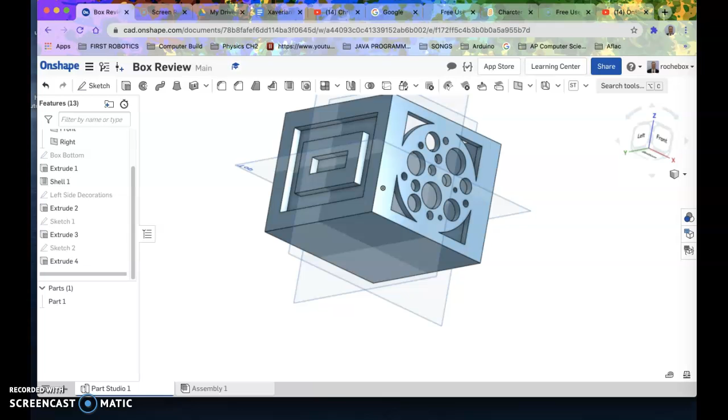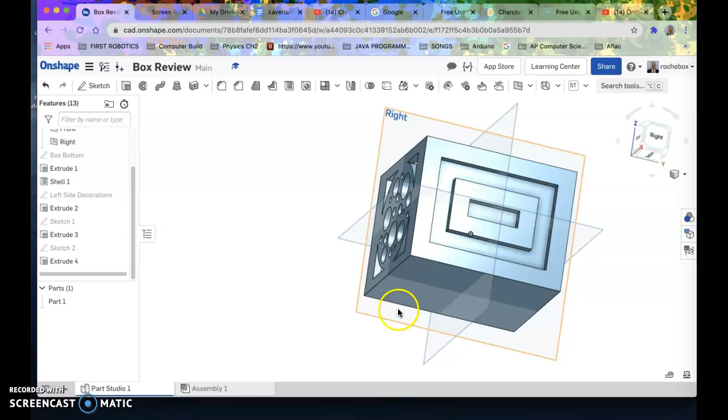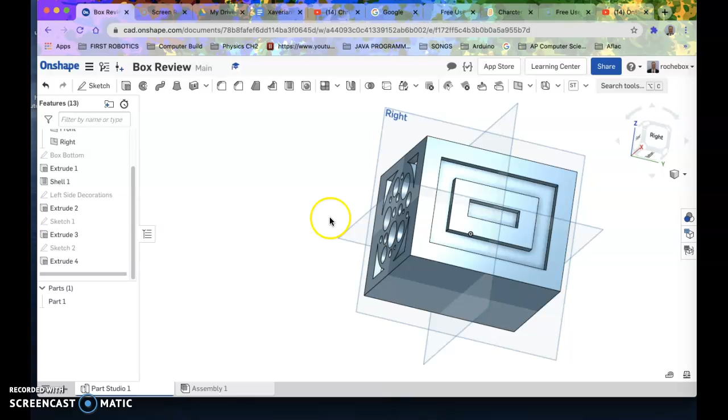We have been working on our box, and what I wanted to do is add some feet to the bottom. In doing that, I wanted to show you a little bit about how you might go about making multiple things, like 4 feet, 5 feet, or 6 feet, or however many feet you might want to use. There are tools on Onshape for you to use to copy things and make multiples of the same thing. There's mirror and linear pattern, which are 3D tools I'll show you how to use. There's also similar tools on the 2D side when you make a sketch. So we can talk about them too.

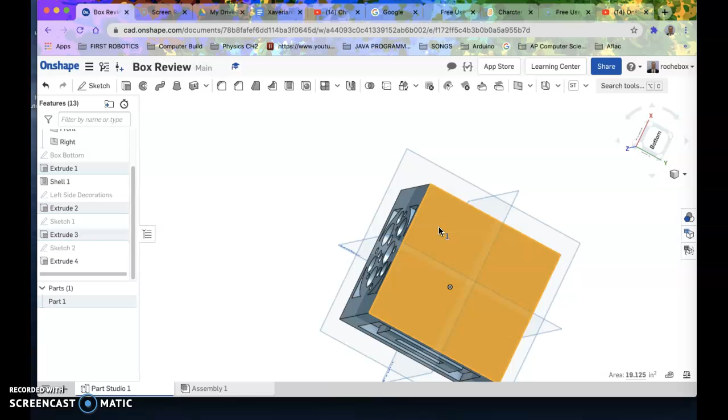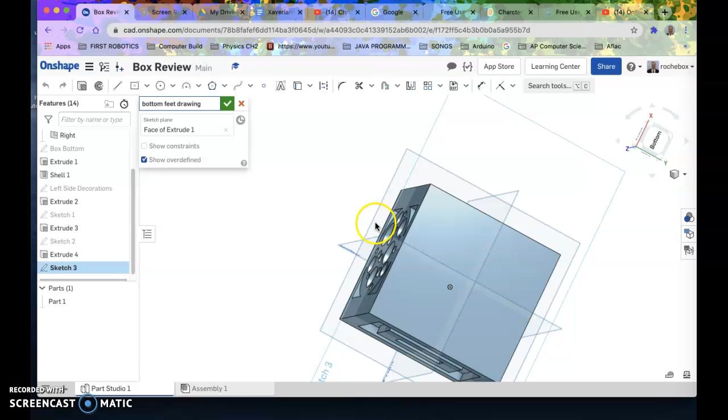Our goal right now is to try to make 1, 2, 3, 4 feet, or maybe more. What we're going to do is click on the bottom. I just clicked on that. I'm going to right click on the bottom and say make new sketch. Now it's in a weird position to make a sketch. I might call it bottom feet drawing, something like that. But the bigger problem is it just doesn't look like it's in a good place, so I'm going to say view normal to sketch plane. I might roll this over because the bottom isn't actually like that. Looks pretty good, that's straight on.

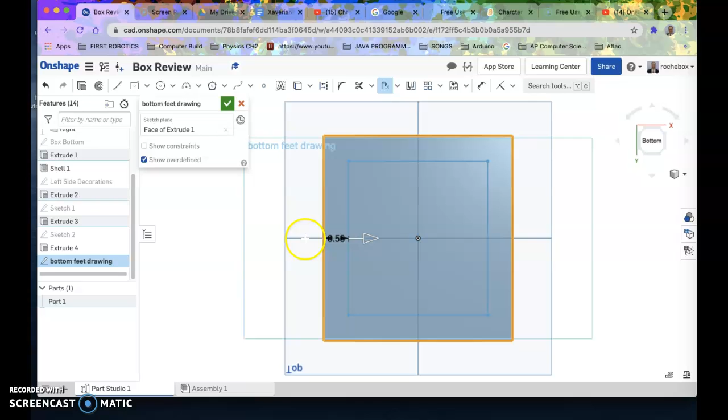So what I'm trying to do is find some places to put these feet, and I'm thinking about making round feet. One way to do this, let me see if I can do this just with offset. I'm going to turn on all of these lines. Yeah, it looks like it's working pretty well. So I'm going to pull this in, and in my thing, I think I want to make them about a half inch round.

So I'm going to make this like 0.65 - whoa, that's not right. I'm going to go back to here. I'm going to make this 0.65, like that, to make it a little bit smaller. And then I don't really care about this square, I don't want to do anything with it. So I'm going to do something special to it.

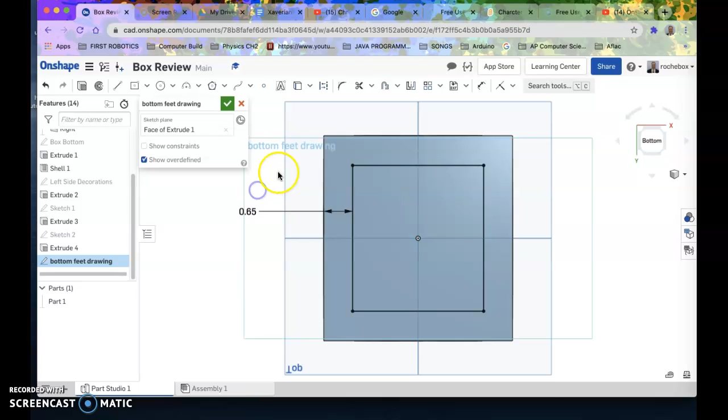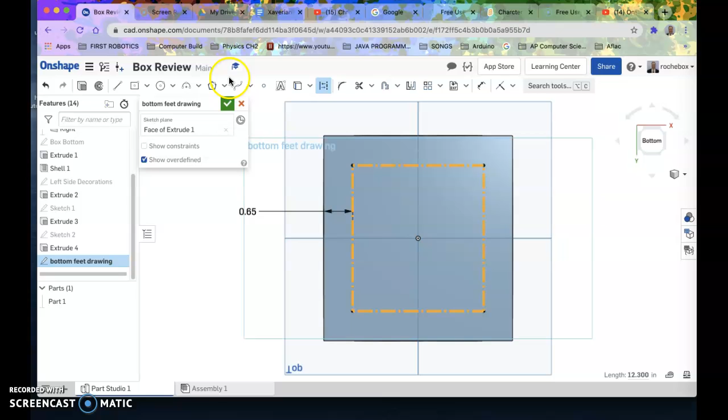I'm going to click all the edges on it, and then I am going to hit this thing called construction line. What it does is make a kind of line or guide that you can use. I know that all of these points fit well and are sort of symmetrical, so I can figure out what I need to do.

So what I want to do is make round feet. I'm going to hit the round circle, center circle tool, and push this out. Oh, it's still doing construction lines, so I have to turn this off. Come here, go this way and see what this looks like. That looks pretty good to me.

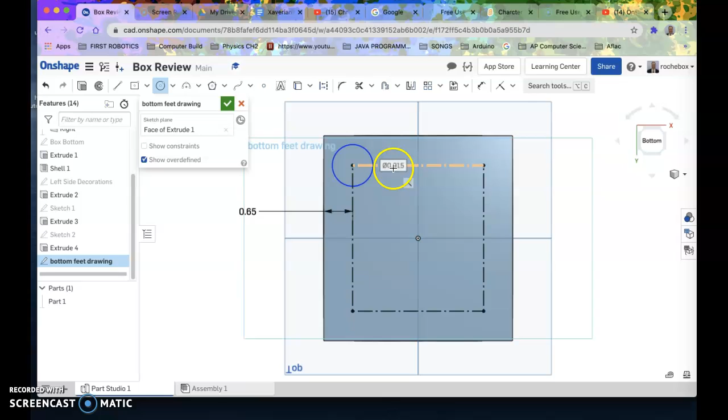This is about 0.915, so I might change this - if you want to use the dimension tool to do it, you go like this and hit dimension. This is how you change this. So you see how this is 0.95, I'm going to change this to like 0.85, something like that, so it's a little bit smaller.

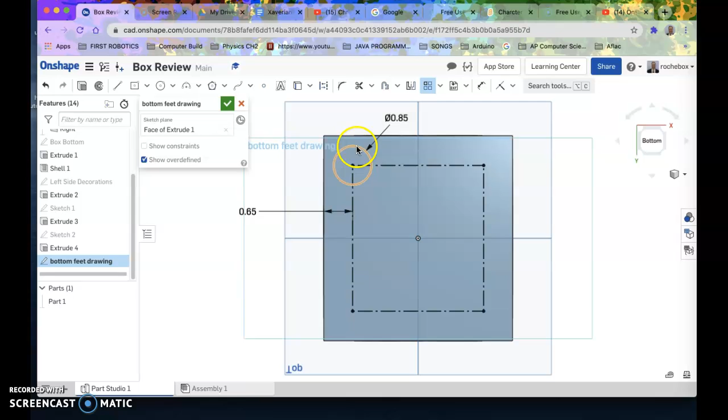Now, like we said before, there's a mirror and there's a linear pattern. I'm going to pick linear pattern in this case. I'm going to pick this, and what it wants to do is pick a linear pattern. See how there's extra holes showing up here?

Okay, so what I want to do is get this to be the distance that it needs to be. There's a couple ways to do this. Hold on a second, let me turn this off. One of the things I need to know is this, and this is 2.95. Okay, that's sort of a bad length, but okay.

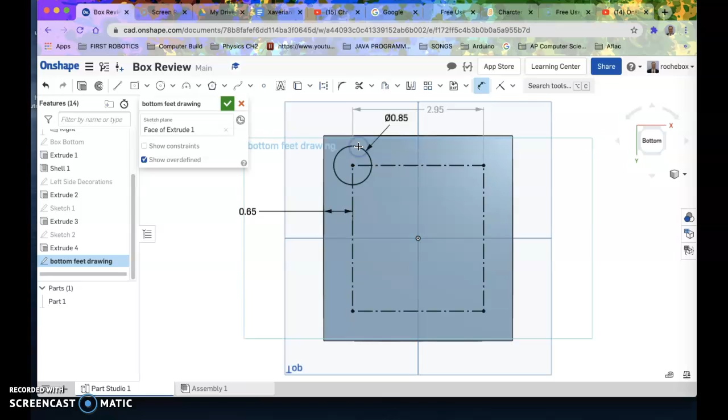So what we're going to do is hit this again. That seems fine, I have no other options for this. This is 2.95. But what we'll do is pick this, the circle. Whoops, I got the dimension tool all over the place here, so I'll stop.

Okay, so I'm going to pick this tool, the linear pattern tool. I'm going to pick it. It was doing what I wanted it to do, okay? And I can go like this and pick 3, right? Okay, so I want 3 legs. That sounds kind of cool.

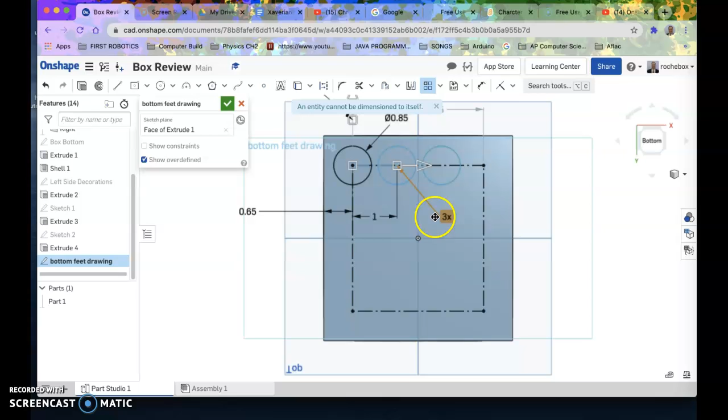And then I want this to be basically 2.95. And then I can actually do math here and just say divided by 2. Let's see what happens. That's pretty cool, right?

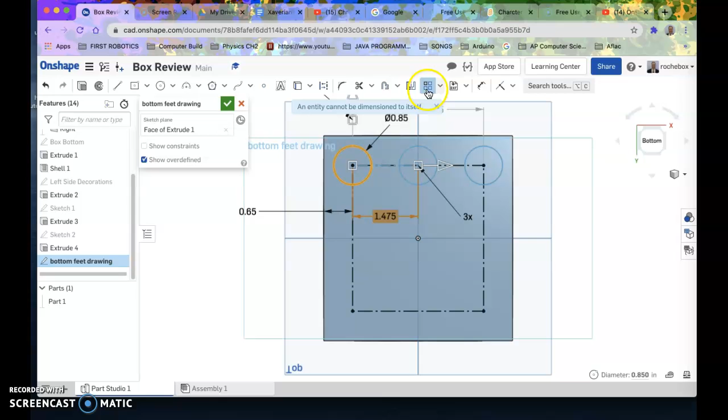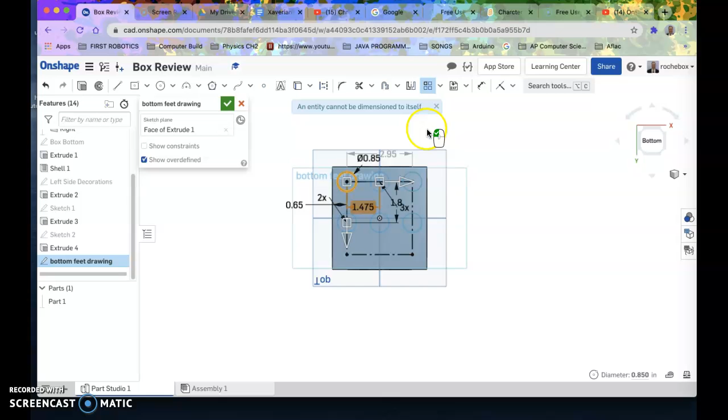And then what's going on here is it's trying to dimension the other way. See this? So I want it to go this way, okay? And I want to at least - I don't know the dimension on this side though, so that's kind of messed up. So wait a second, maybe I need to stop and do it again. I'm kind of close, okay? So let me see here.

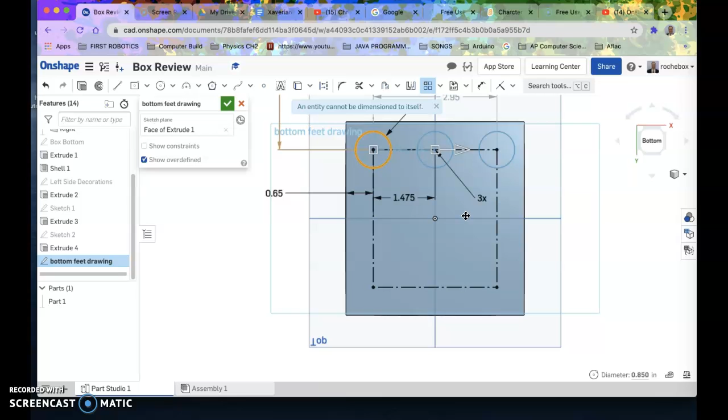Let me see if I can just drag it down there and just see. This looks about 3.2. Let's see what that looks like. Okay, so this went the wrong way. Okay, so I need to pull this down.

And I actually want 6 of them. So I'm going to say 2 here. And then, what was the distance here? We're going to pull this back. And make this just make them fit, that's all.

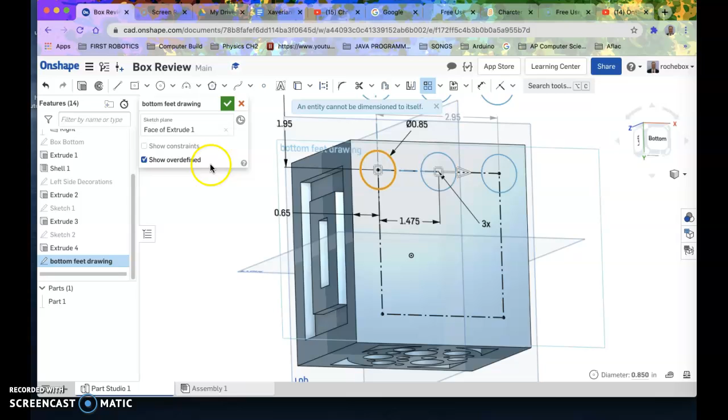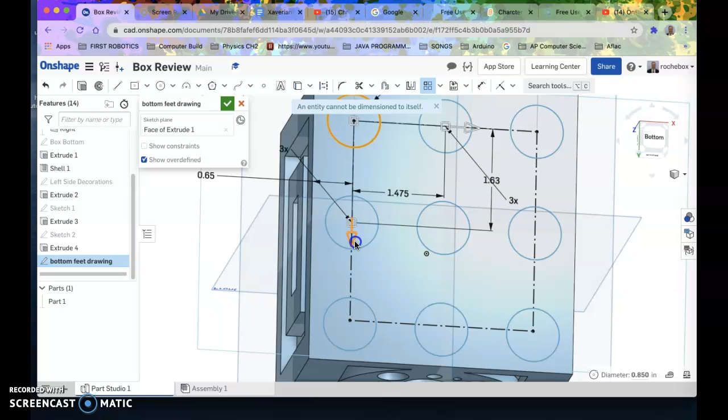What happened there? I think that's what we're trying to do - we're just trying to get these to sort of match up. And you can see I'm not over the center, right? So I need a dimension here right now, but I'm close.

So what I'm going to do, okay, I'm going to turn this off again. Okay, I'm going to go to the dimension tool. I'm going to pull this out. It's 3.2 inches, okay, I'm going to put this on again. I'm going to click this, okay. We know this is 2.95, so I'm going to make this 3.

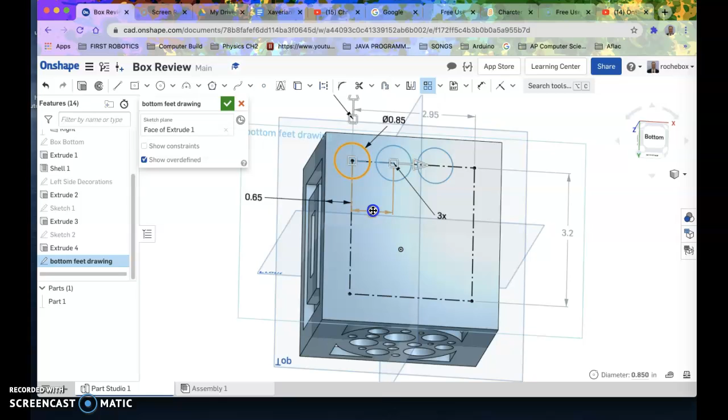That's cool. I'm going to click on this and say 2.95 divided by 2. Boom. And then on this dimension, it's going the right way now. I'm going to say - I don't know what's happening here. It says 2 times, so I'm going to click on this and say 3 times.

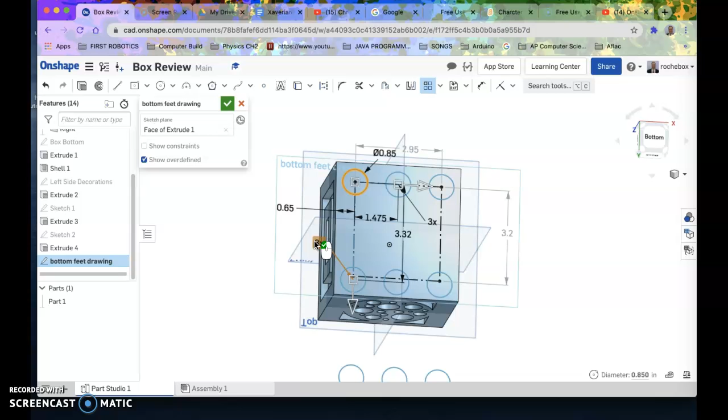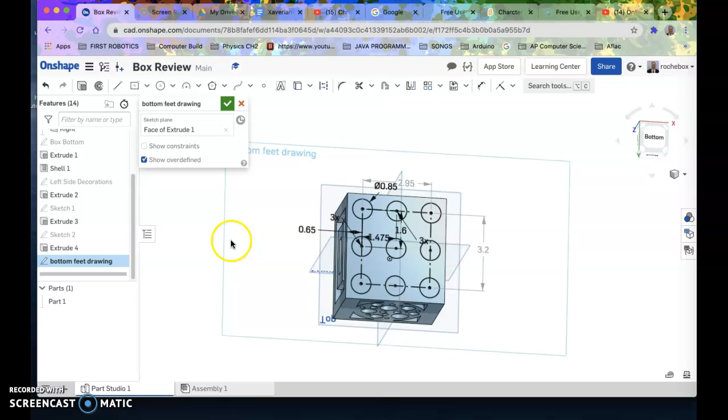Okay, and then the distance here that I'm looking at - oh, it's right there. We know this is 3.2, so I'm going to say 3.2 divided by 2. And that's it, so if I click off this, I'm done. What I've done is I've made all these cool patterns, right? Okay, so I'm done, I'm good.

Okay, and then all I need to do is extrude it. So I'm going to pick this. Yeah, I guess I'm going to pick this. Let's see what happens if I extrude this. Yeah, there they go, okay, so there they all are.

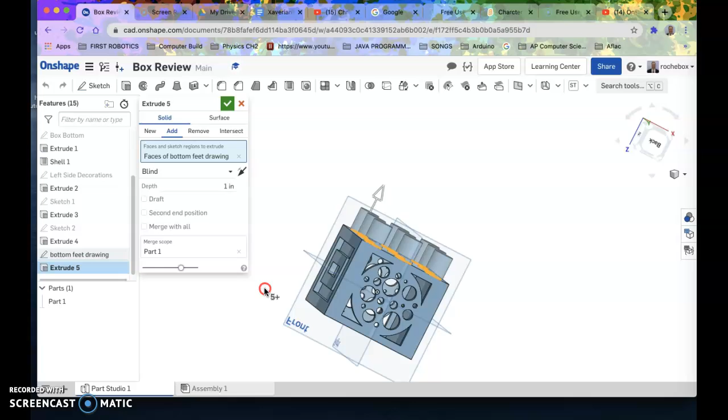And that's pretty awesome. I'm still doing an add, so this is like 1 unit. And I have to see if I like this at 1 inch. I guess I do, so I'm going to say okay. And there it is, there's my little box. I'm pretty proud of it.

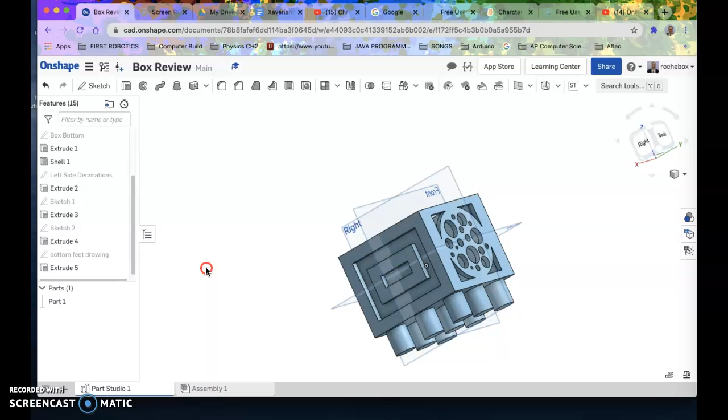So what I want you to do is to do stuff that's going to make you proud and make you feel like you have an awesome box, okay? But that's what we're looking for, okay? Thanks.